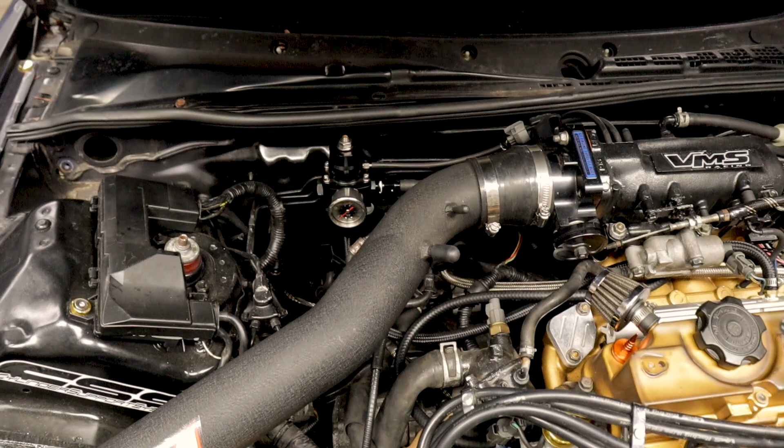This actually came in needing a handful of things before we even got to this point. So hopefully, as a part of that, we've eliminated a majority of what can go wrong. So what we had to do up to this point was mount the fuel pressure regulator. The clutch cable needed some adjustment. I think that has a strong chance of becoming a problem. I think it might just need a new cable, which we don't have, so that might have to be something that's done down the road.

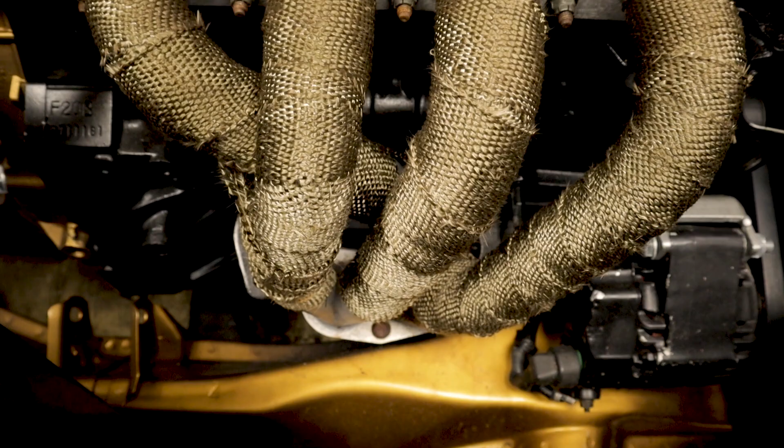I'm sure once I get in there and start driving it on the dyno, you're going to see it struggling a little bit to get in and out of gear, because the header here is, I don't know if it's bent or just the way that it fits in this particular car, but it's kind of pushed up at the oil pan, and it's hitting right into the shifter. There's really no easy way to correct that issue without taking the exhaust off, cutting it, doing a whole bunch of crazy stuff. So we're going to hold off on that for now and see if there's anything else that we need to deal with first. So that's kind of interesting.

We had to run wiring for VTEC, had to run wires for the wideband. Has an AEM wideband in there, so those seem to be a little bit hit or miss on whether they want to work properly with the ECU or not. So when this was first dropped off, I went to start it to pull it inside, and I didn't think we may even get to the point of getting on the dyno. It was running so bad. But the primary issue was the MAP sensor was wired incorrectly. So as far as the computer was concerned, it was seeing 10 pounds of boost the whole time. So obviously dumping a ton of fuel.

The idle control valve was not wired correctly, so I had to adjust that. Had pinched O-rings for the fuel injectors. Those were leaking. A leaky fuel line going to the rail. The fuel pressure gauge does not work, so I'm actually still going to need to set the fuel pressure, and corrected all of that. Finally got it to start and run like a normal car, and couldn't get the idle to drop below about 1500 RPM.

It was about a gallon low on coolant, so had to put some of that in there. Gonna check the oil one last time, just put some fresh plugs in it, and I haven't had any F20s on this dyno, so I'm not sure what it's gonna make. I think the last F20 I had was probably on our Dynojet way back when. Jeez, now that I look at it, it looks like the crank pulley is literally resting on the frame of the car, so might get some fireworks. Have to keep an eye on that. Huh, still has the balance shaft belt on it too. Haven't seen that in quite a while. Alright, let's get started.

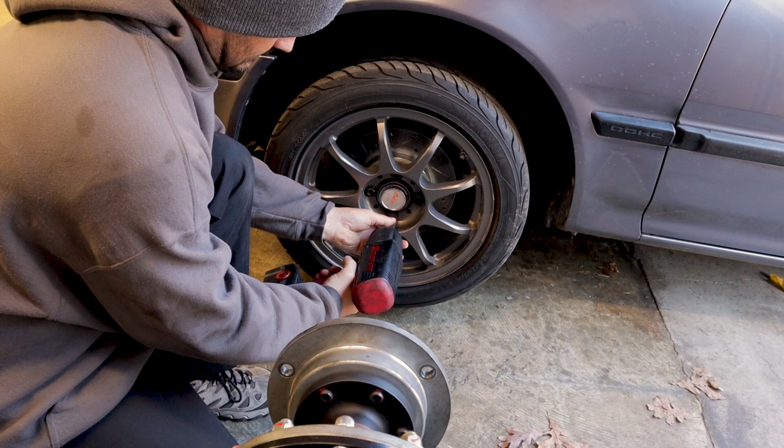Here's another benefit to a hub dyno. If this was on a roller dyno, there'd have been no reason to check it, but it could have gotten ugly pretty quick. All of the wheels are loose and about to fall off. You can imagine that a rotor directly onto the roller on a Dynojet or something like that would get torn up pretty bad in that situation. Have you ever wondered how the dyno actually connects to the car? Have a handful of these different hub adapters.

And the dyno just bolts to that.

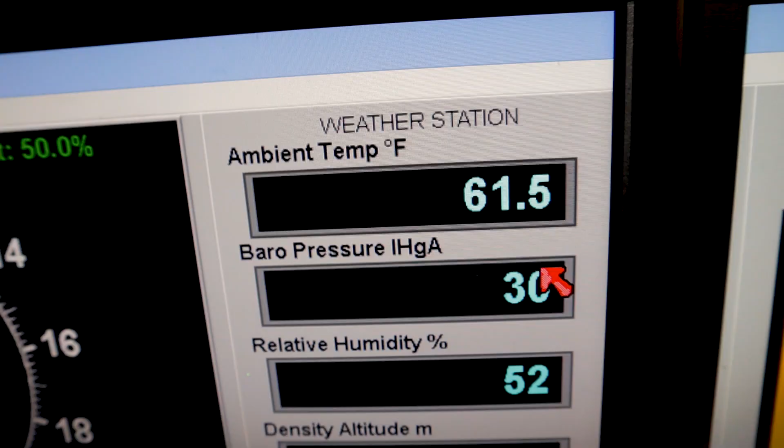61 degrees in here and I'm freezing to death. Hopefully that doesn't mean I'm getting sick or something. That would suck.

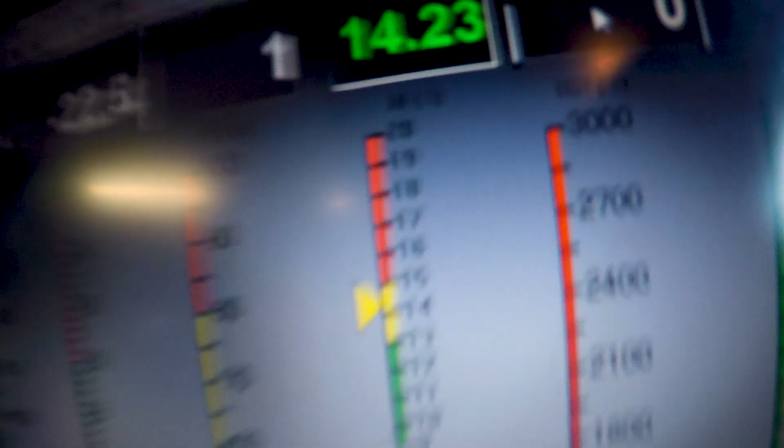This motor is really, really quiet. It's awesome, I love it. Just letting it warm up for a little bit. Ow! And set up the scaling for the wideband, and the AEM stuff's kind of hit or miss, but this one's pretty close. I'm happy with it so far. So like 14.2 or so here, and 14.1 or so here. Yeah, it's off just a hair, so I'll probably tinker with that a little bit more.

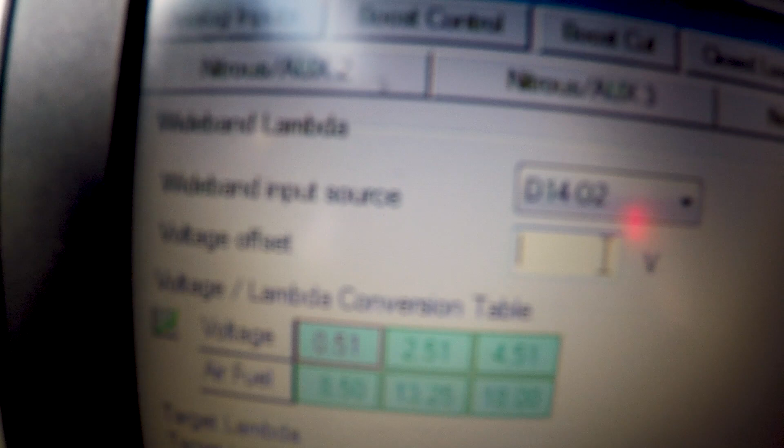So we go here to the voltage offset. That's where you would kind of clean that up a little bit. And then after you push the wrong button 100 times, come back here. 14.2, 14.2. So that's about as good as that's going to get. So the offset was about 0.2 volts.

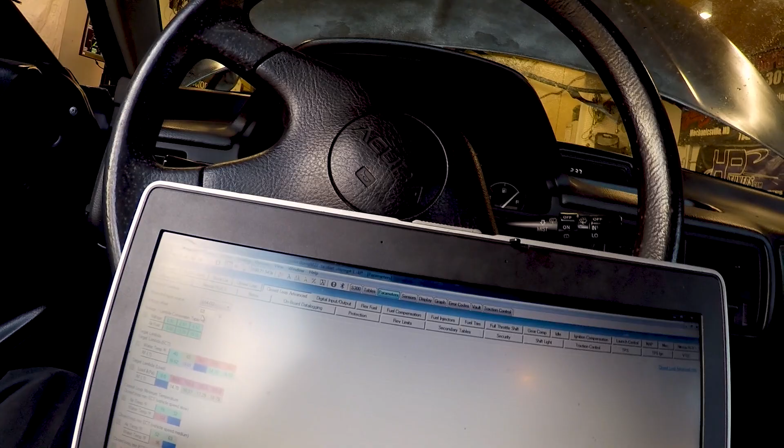That's pretty close, but if you ever get to the point where you need to change that number a lot, then you need to revisit how you've powered and run your ground wire for the wideband. 99% of the time that's an installation kind of error. There's a ton of information online, you can search that, but this is pretty good for now.

I set the timing on this about 4 or 5 different times yesterday or whatever day that was, but I wasn't able to get it to idle as nice as it is now. So now that the idle's a lot more stable, I'm going to go ahead and just resync that, make sure everything's good.

This is the best timing light I've ever used, and I'm pretty sure I've had every one out there. If this broke today, I would overnight another one tomorrow. I wouldn't even consider buying anything else.

I still can't believe how quiet this motor is. Usually these F and H series motors are so loud you're scared to walk near them. You're gonna get smacked in the mouth with a connecting rod or something. This is cool. So this has an F to B or H to B conversion kit, and the flywheel has no mark for the timing mark. So you're gonna have to do it off the cam gears, but the valve cover is not cut, so it's pretty hard to see. So gonna look kind of silly doing this, but it works good enough.

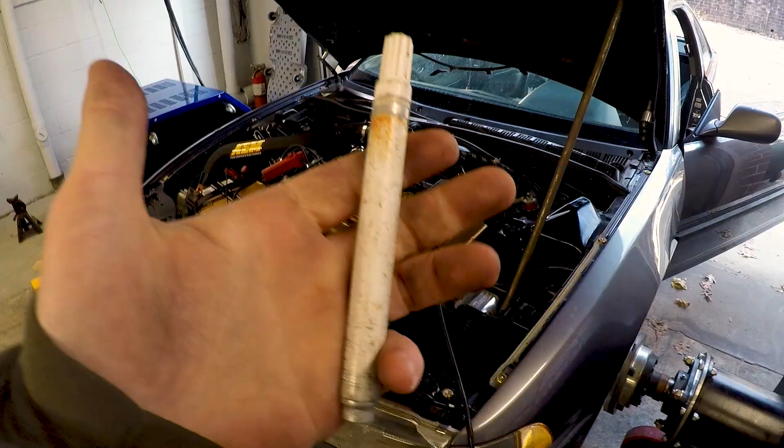The paint marker is actually a mandatory dyno tool, ironically. Let's see what wonderful shape this one's in. It gets used every day, just about, it seems. Alright, timing is good to go, so I guess it's time to start driving it, and let's see what some steady state stuff looks like.

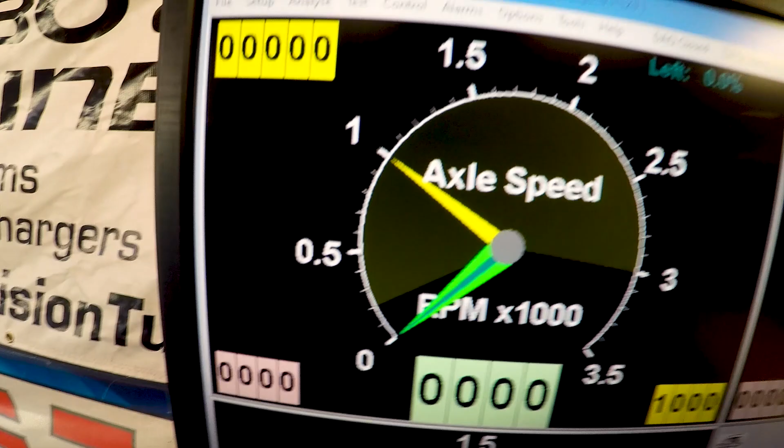So I'm actually not sure what transmission's in this, so I'm going to use the dyno to calculate the gear ratio. And then at that point, we'll use this screen over here, and I can set the axle speed, which will convert over to engine RPM, and then we can hold the car at whatever engine speed we want to. And I'll show how that just changes everything with part throttle tuning.

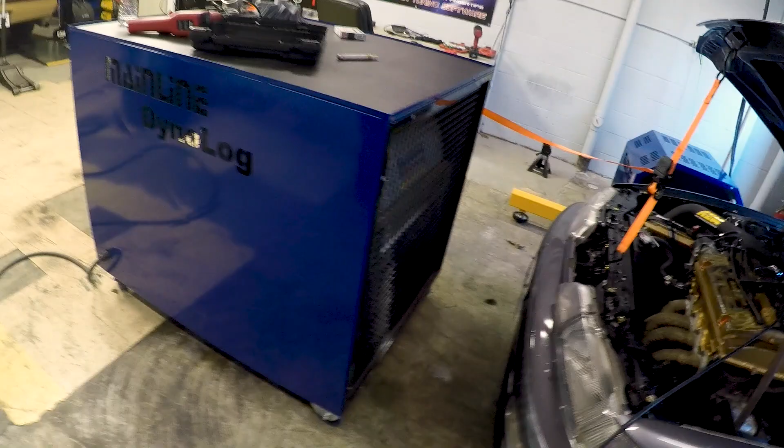It takes longer to get everything set up than it is to actually tune this thing, but my big crazy fan was trying to rip the hood off of the car, so I actually kind of had to strap it down so that it doesn't fly back and smash the windshield. I think I got everything working now, so start driving it a little bit.

I almost forgot I need to set the fuel pressure, so I'm just going to throw a fuel pressure sensor in it and load it up into the dyno and do it that way. So I just pulled the fuel pressure gauge out, and like literally not one drop of fuel came out. It's kind of unusual. Now I don't know what to expect with the actual sensor in there. Maybe we'll get lucky and it just seems weird, but it's normal. Let's see.

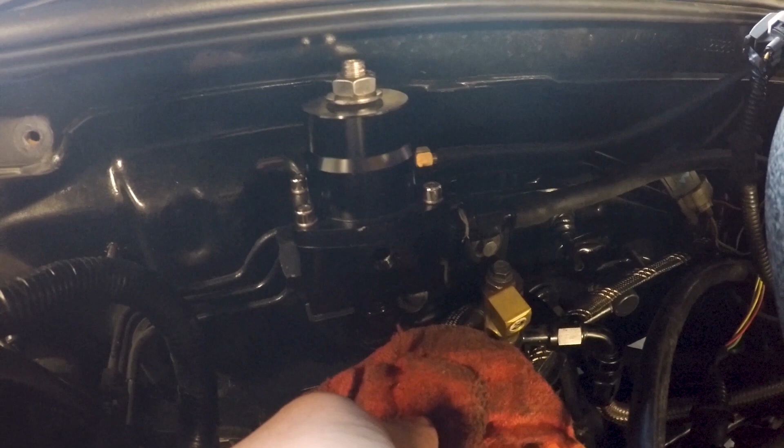So with the fuel pump on, there's no fuel coming out. This is really confusing. The car shouldn't even be able to run like this. Oh. Do they have the regulator plumbed backwards? Alright, this might be a first. Let me see what they got going on here.

Alright, so I've never seen this before, but from the fuel rail, I got it going to the bottom side of the regulator, and then this is going back to the fuel tank. So I need to swap these two fittings around. Hopefully the hoses and whatnot are long enough. They may or may not be, but I think I got enough there to at least hook it up, make sure it works.

Line's broken off of here too. Probably have a fitting for that. Alright, so we're roughly 40 psi, about 43 pounds, so that's where I want that. So we'll call that good. And I'll try and see if I have a fitting to fix this broken one.

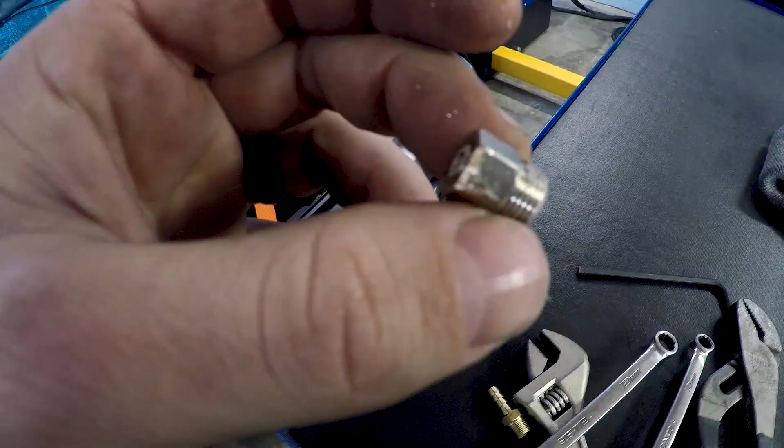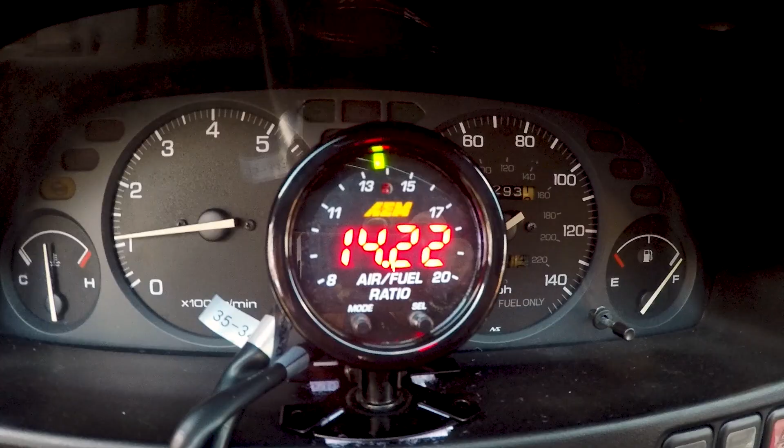This fitting was torqued to about 700 foot-pounds. I almost didn't think it was going to come out. We'll just swap it for one of these. Alright, back in business there. Let's start driving this thing and see what happens.

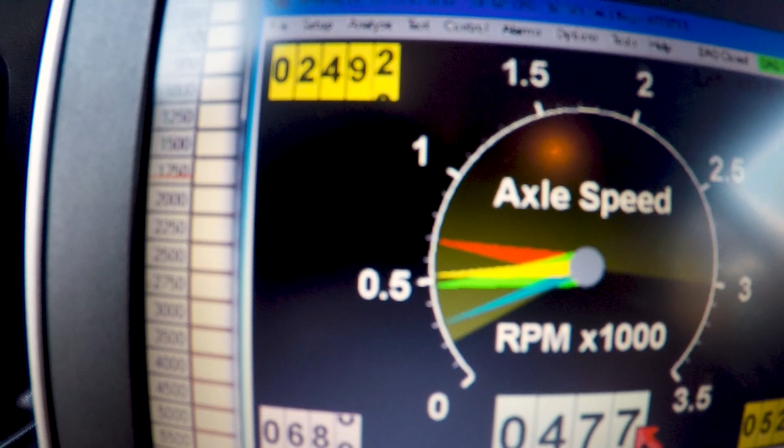Alright, you can see I have the dyno set to about 2,500 RPM. And see the green needle is actual RPM. Now you can see here, this is a 2,500 RPM load column. And I'm at 17 inches of vacuum, which is about 6% throttle.

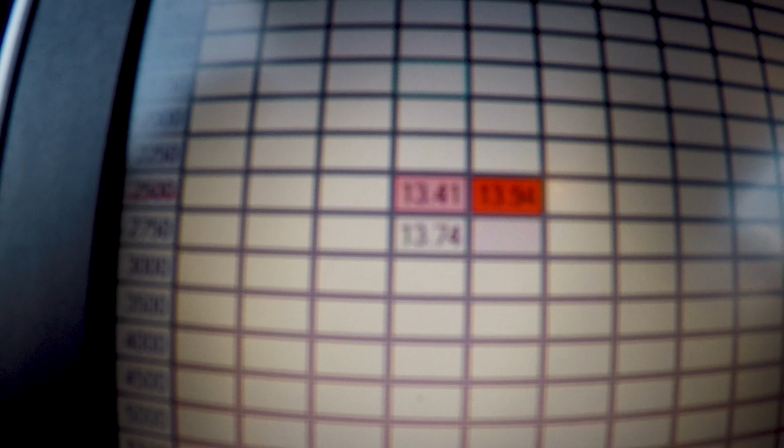And now the dyno, I'm going to roll into the throttle. The dyno is just going to hold it at 2,500 RPM. And then input what the air fuel is in each one of these cells. And you kind of want to let it sit there for a little while to stabilize. That's full throttle, still at 2,500 RPM.

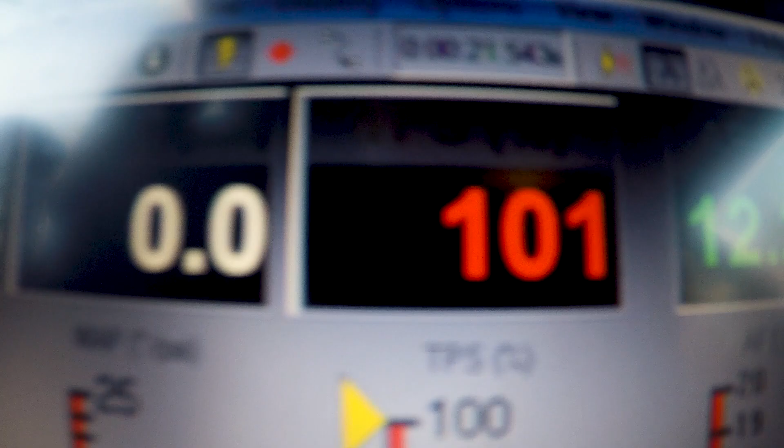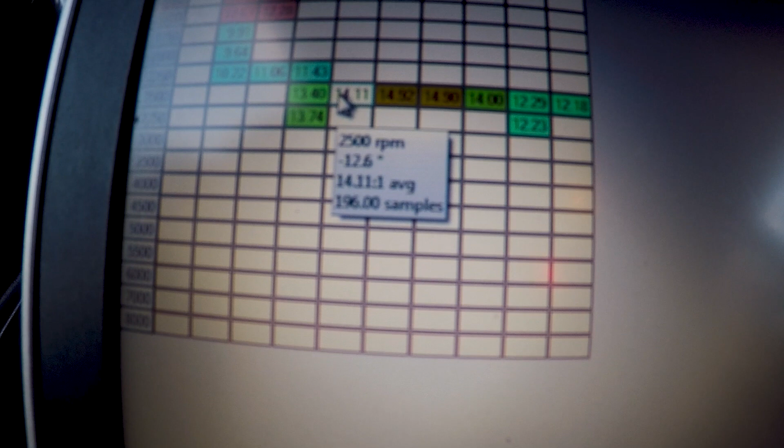So now all of these values here at 2,500 RPM, we can see what the difference is between our target air fuel and what the actual air fuel is. The target air fuel is going to change with throttle position and manifold pressure. You can see this is the first run, so it's pretty far off, but we're in the 14s here in the mid-range, and then a little leaner than we want to be, but up here in the full throttle range, it fattens back up, and a little further out from the target.

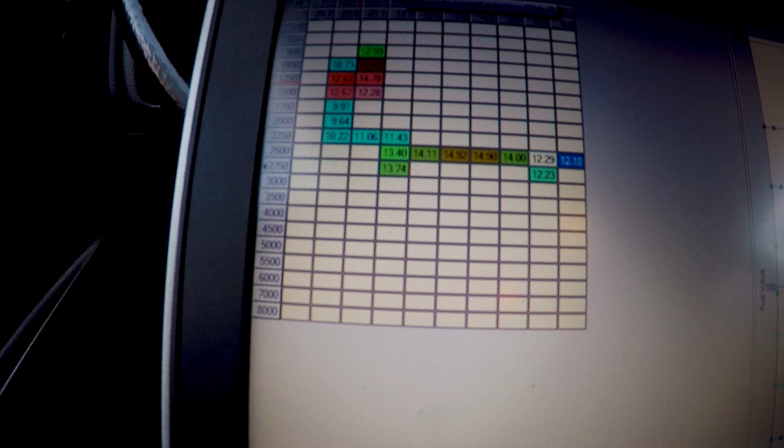But so we can repeat that through each one of these breakpoints: 2,500, 2,750, 3,000, 3,500, so on and so forth. And so you can view this different ways. I like this 2D view the most, and you can see here where I'm just kind of trying to rough it in. Once I get into the ballpark, then I can come back through and smooth all this out and make it look nice. And that's kind of how this goes. So let me smooth this out, and we'll bump it up and try some other RPM points.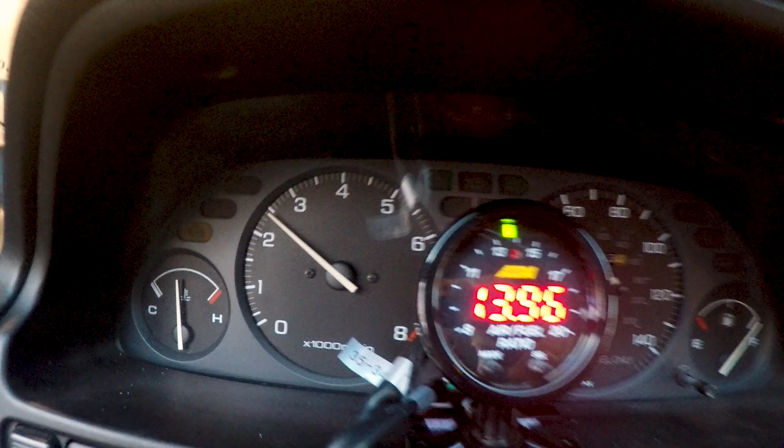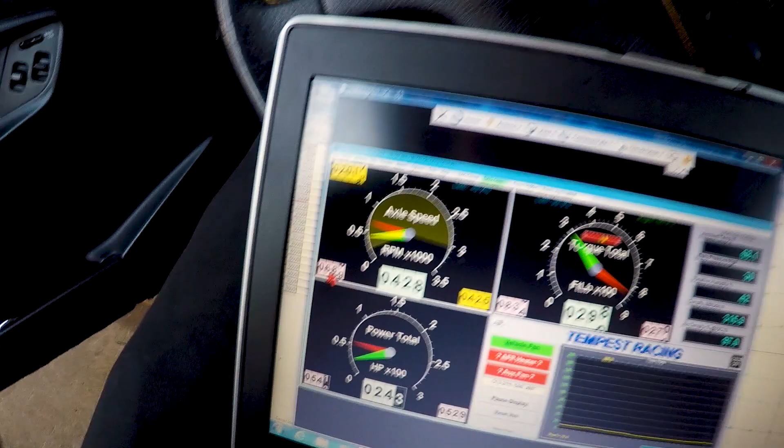Time, 50 horsepower full throttle, and then real-time torque. This is just kind of cruising RPM, cruising throttle, so it's pretty close now. So whenever you see I post a video and it's showing a car made 1,000 horsepower at 900 RPM: this is engine RPM, and this is the actual axle RPM, and that's the number that you're seeing. So yeah, everyone always freaks out and thinks that dynos give you bogus numbers. It's just a different way to look at it.

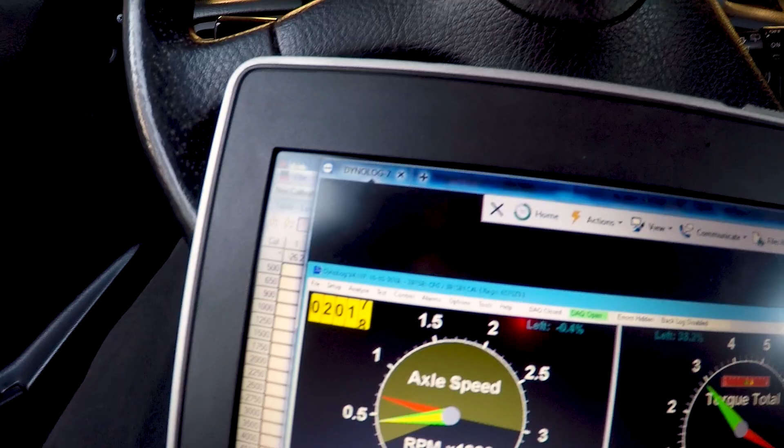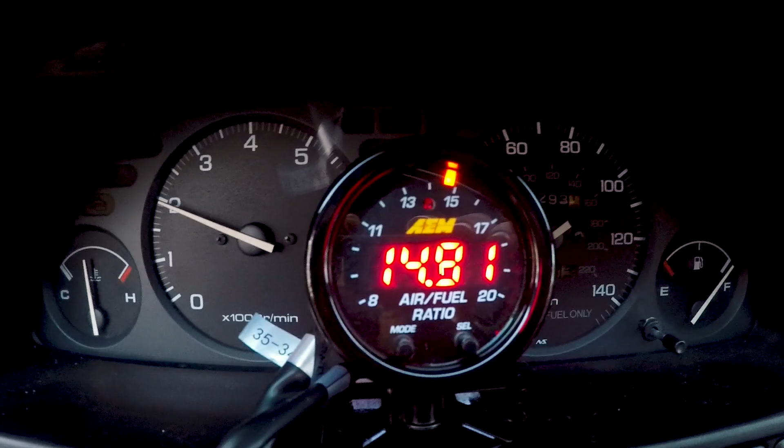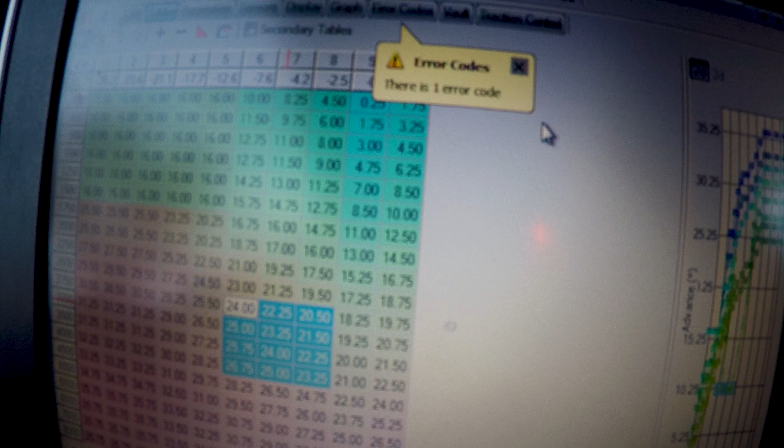So I just dropped the engine speed to 2,000... cell by cell, and you know, you can spend hours doing this. Torque stuff with timing. I'm gonna highlight all of these. Set everything in this area to 10. And then if I undo the change, pretty big difference. And that's all without touching the throttle.

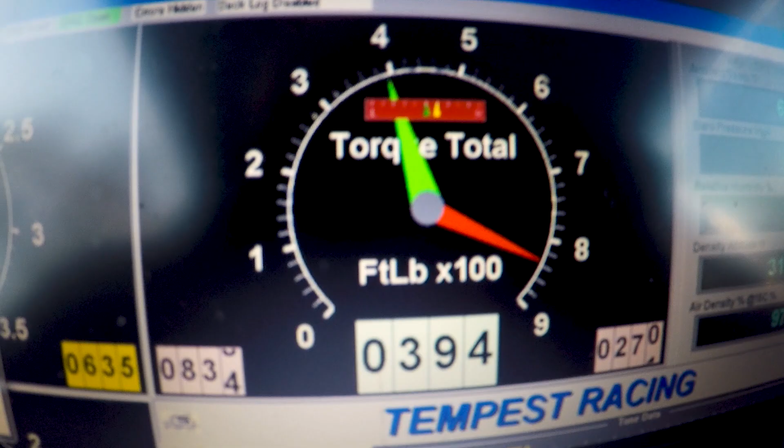Alright, I'm going to give this a minute to cool down. I just had a customer show up to drop a car off. And I'll probably need to do 1 or 2 more sweeps of this part throttle. And then we'll switch over to full throttle and start doing some actual sweep style runs. That's where it gets a little bit more fun.

Ironically, this stuff here can be more entertaining to me than the full throttle stuff, kind of depending on what it is, but there's a lot of cool stuff you can play with, and this dyno just changes everything as far as figuring out what's doing what, and what's working, what's not. And you'll see when we do the full throttle stuff that we can actually monitor the dyno graph and everything real time, which I can't explain how helpful that is, especially when you're really pushing the limits of something. And I'll go into a little bit more detail on that here in a few minutes.

Alright, just swept all the cells up to about 4,000 RPM. I'm going to switch over to start doing some sweep runs now, but this car runs really hot. I saw the radiator fan on it earlier on and was kind of questioning how well it was going to work. So that might be an issue, but the steady state stuff demands a lot on the car for cooling, and then the sweep stuff's a whole lot easier. You can set the runs up to only be a few seconds long, so it's not putting as much load on the car versus holding it at a given RPM. It's like you're driving up a mountain.

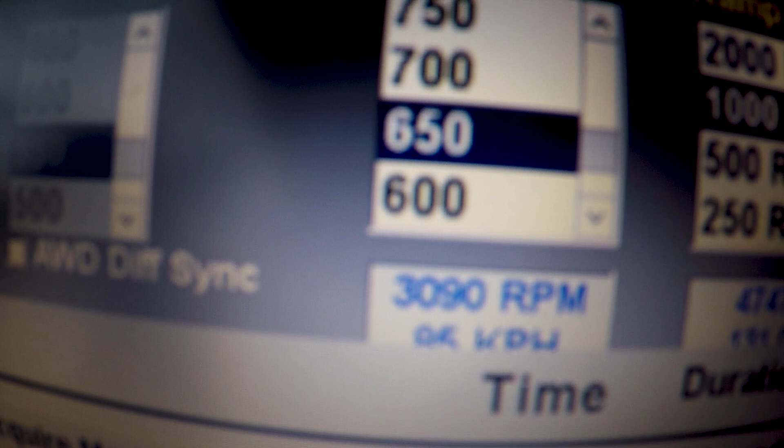So the rate of acceleration, I'm going to use 120 RPM per second on this. I'm going to start at 650 axle RPM, or about 3,000 engine RPM, and then I just set the end speed higher than where I'm going to go. Last car I did was scaled for 2,000 RPM. Don't think we're going to need all of that.

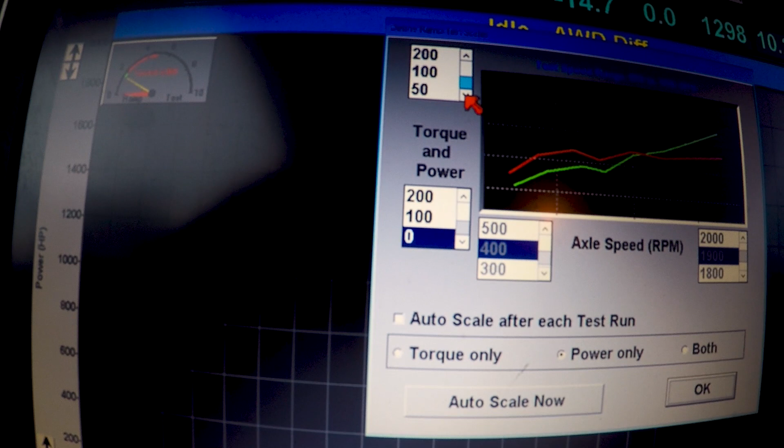Computer's going in slow motion. Will be more than enough.

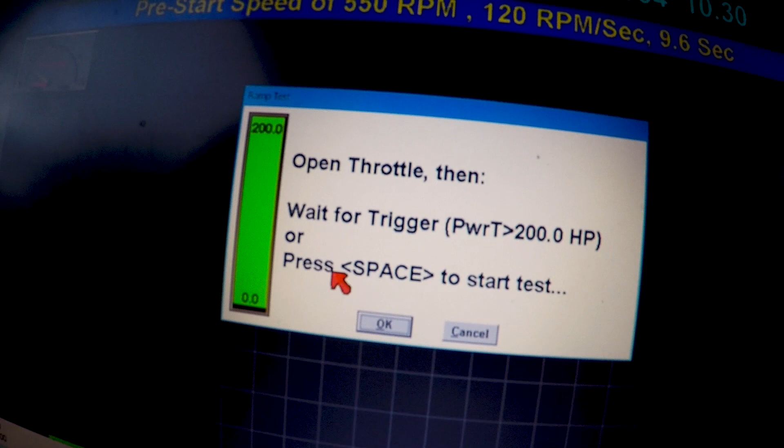I'm set up to start the run at 200 horsepower, which isn't going to work for this, so I'm going to change a lot of the setup. I guess the last car I did must have made a lot of power. So we'll change this up and make some runs without VTEC on.

This trans is so hard to put in gear. Just gonna make a short run without VTEC on.

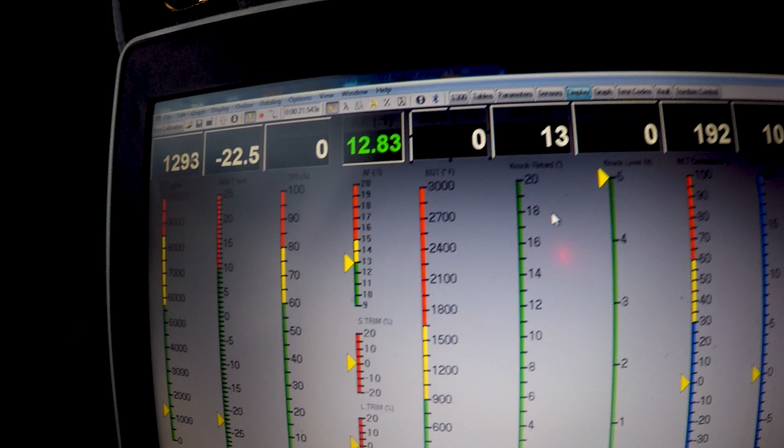Some fueling at higher RPM.

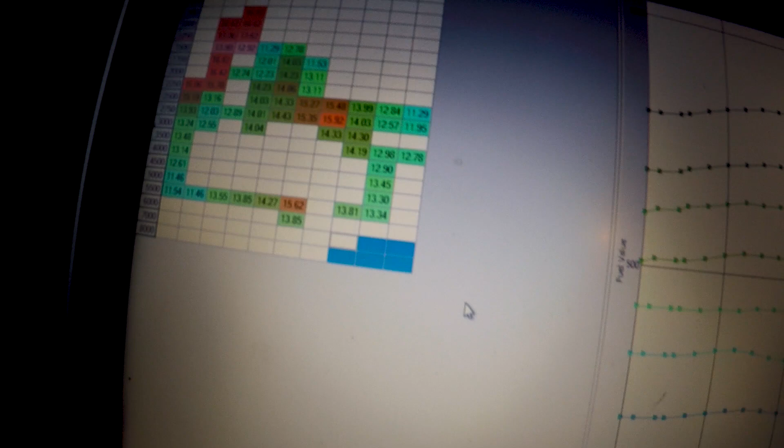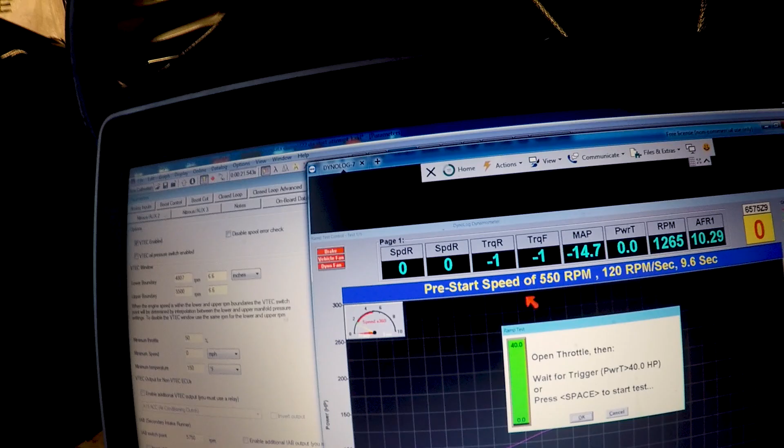Turn VTEC on and start trying to populate the high cam map. Alright, just set VTEC to come on at 4,800 RPM. Hopefully it works. These things tend to, well, for whatever reason, when they end up in swap cars, seems to not want to work all the time. Let's see what we got.

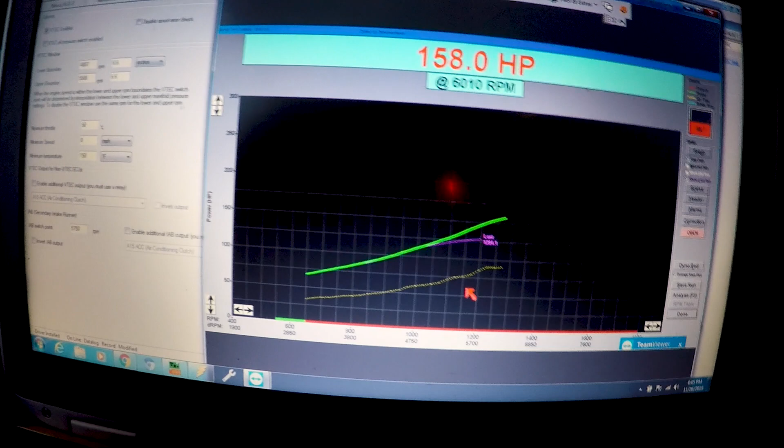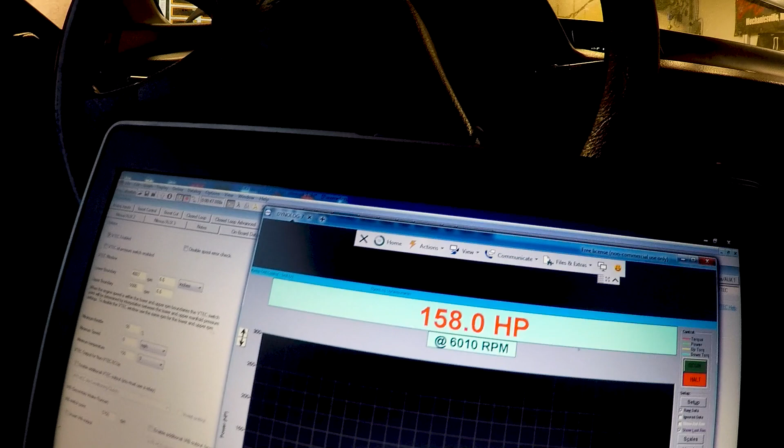It's super lean, so it's actually a good sign. Power wise, I don't know, I guess it's on track to what I was expecting. This dyno is very stingy on all motor cars. Anything less than 200 horsepower, it kind of really, I don't know, it doesn't read anywhere close to what my DynoJet would read.

And you can see there's a big time delay in this graph here. I'm just remotely connected to that computer over there, so yeah, there's just working on a delay, so ignore that. Gonna need to get some screen recording software to make this easier, but...

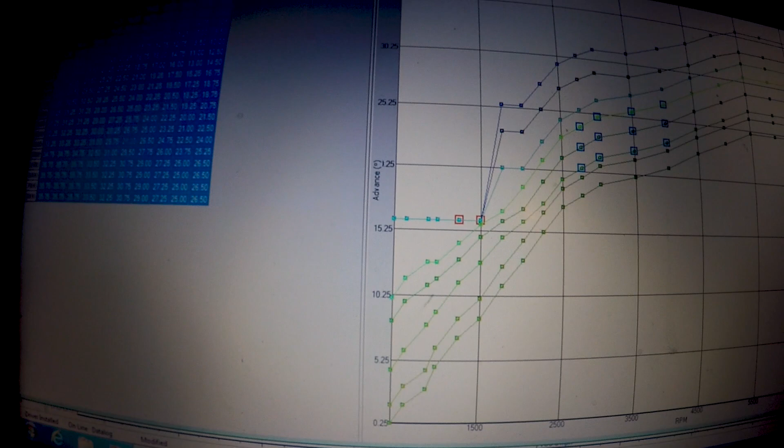It looks like about 5,500 RPM. We need some fuel, so I'll go over here to the high cam. And so if you look at the shape of this, where it says we need fuel is right in shape with this map I started with. I've tuned so many of these that most of the maps I have to start with are pretty close, and this is following the same trend.

And my battery is about to die, so I'm gonna make some changes there. Hopefully it'll take a couple runs to get the fueling straight. I can rev it out all the way and then throw a little timing at it and see what it does.

My guess starting out before, you know, before you can put it on the dynos, I was hoping it would make somewhere like 175, 185. So looks like we're not too far away from that. And that was only about 6,000 RPM.

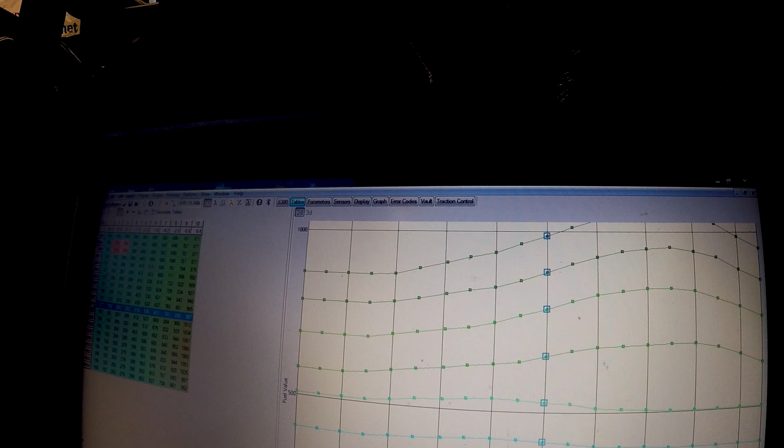Alright, let's try this again. It's kind of hard to do holding two computers, a phone, camera, a shifter, steering wheel. This will be way easier once I figure out some screen recording software, so I'll do that next.

So the power is actually really close to what my prediction just was. It's like right where I thought it was going to be. Now it's about 7,500 RPM. You can see it's starting to lay over a little bit, so probably take it to 8.

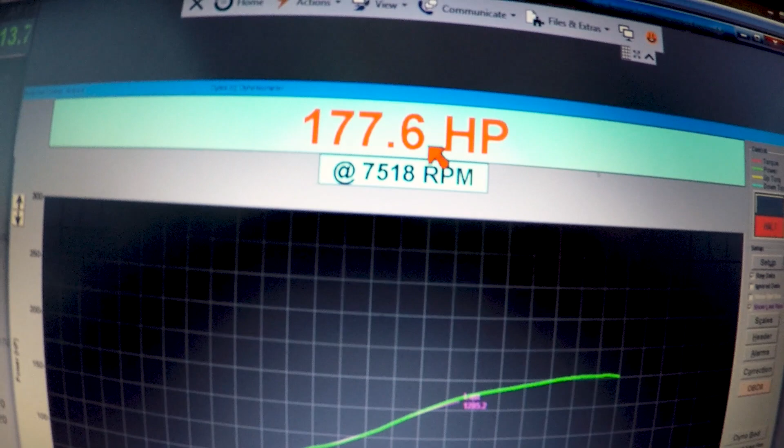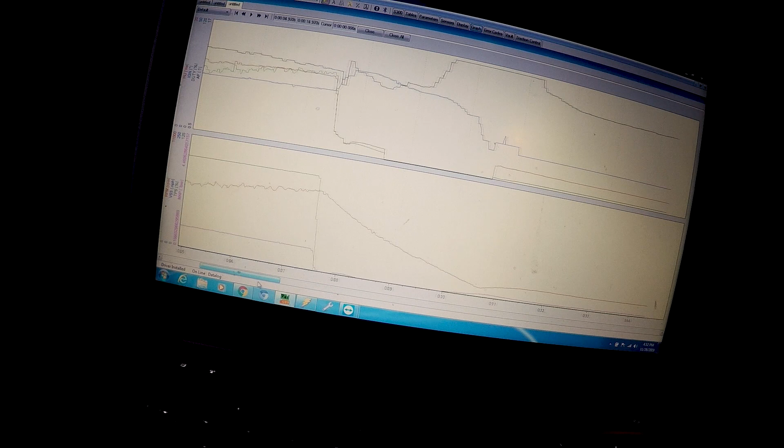Hopefully with a little timing this will jump up over 180. And fueling for the most part was pretty good. I think there was a couple of cells I might need to add a touch to, and then above 7,000 RPM, it starts getting a little bit rich. So we'll pull that back out.

Distributor on this car seems to be a little skanky. That RPM trace is kind of gross. Alright, we're pretty close. Hopefully a few more runs will be ready to go.

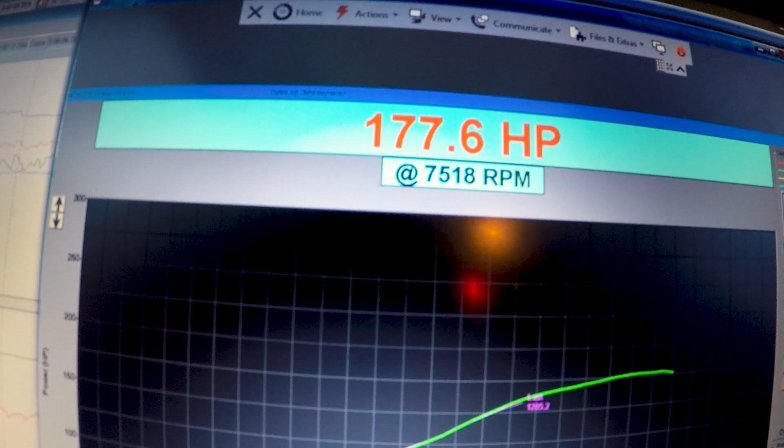Probably the most important thing to note here is how smooth the graph is. With some more timing, it'll probably smooth out a little bit more. Once you see graphs that look real choppy, like this RPM trace, when you see a dyno graph that looks like that, it's usually a sign of an engine that's unhappy.

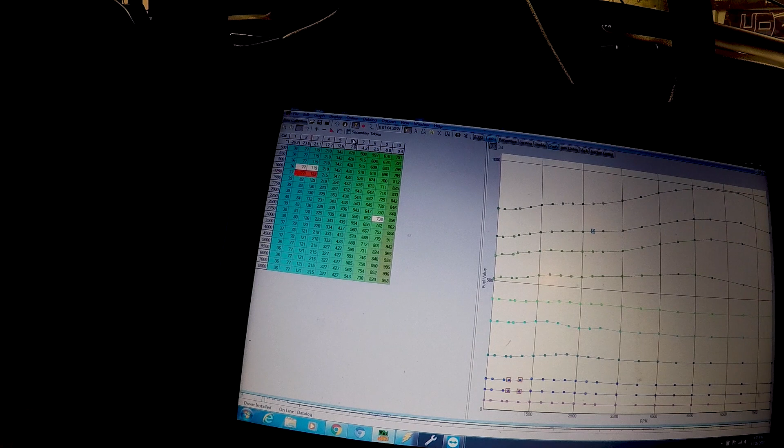So 55, 5600. Add a little bit. Blend it in a little bit.

In, even though we won't be up there.

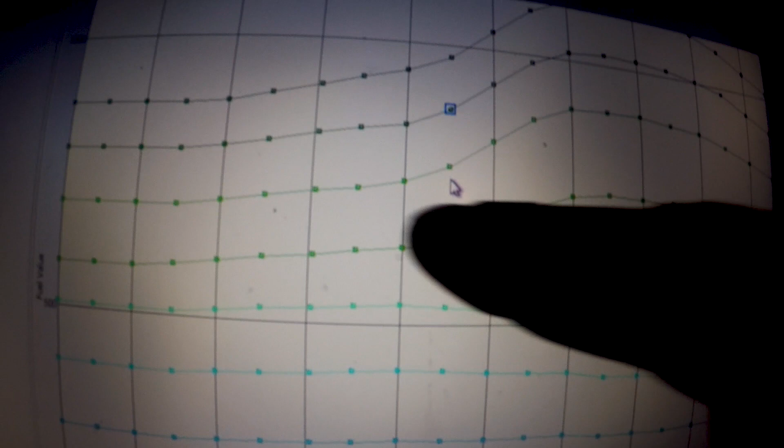The big thing is you want everything to be nice and smooth like this. When you start having big humps, and say for example you move this up there like that, and maybe move this one down here like that, as the engine's running through, it's going to have these big huge spikes, and that'll just make it run pretty rough. You'll definitely feel it.

And if you look at the data log and monitor the injector pulse width, you'll see that it should, in theory, stay nice and smooth like this. If the pulse width is doing this instead, then the car is just going to run all jerky and nasty.

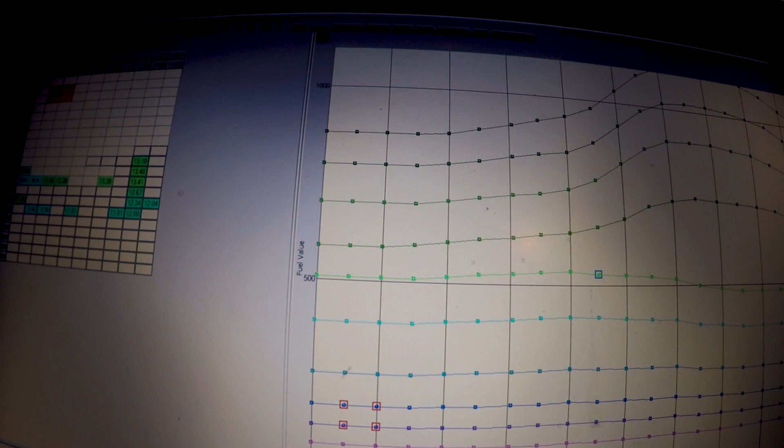Alright, I'm pretty happy with that. I'm going to throw 2 degrees of timing in it, see what that does.

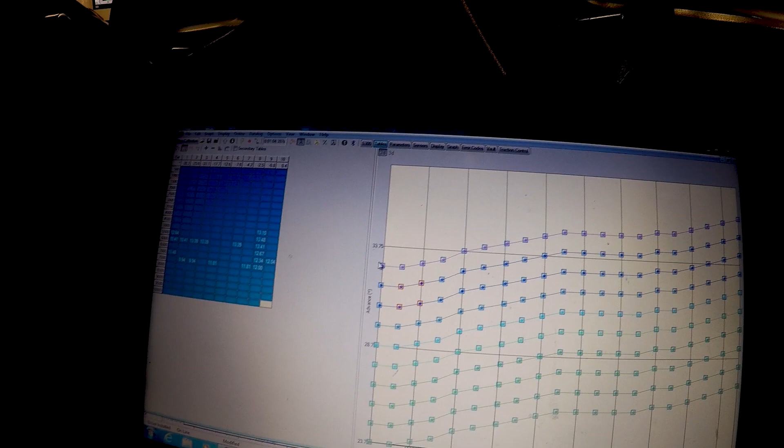There's a couple spots here I need to smooth out a little bit. Can't see the tach, and the headlights don't work.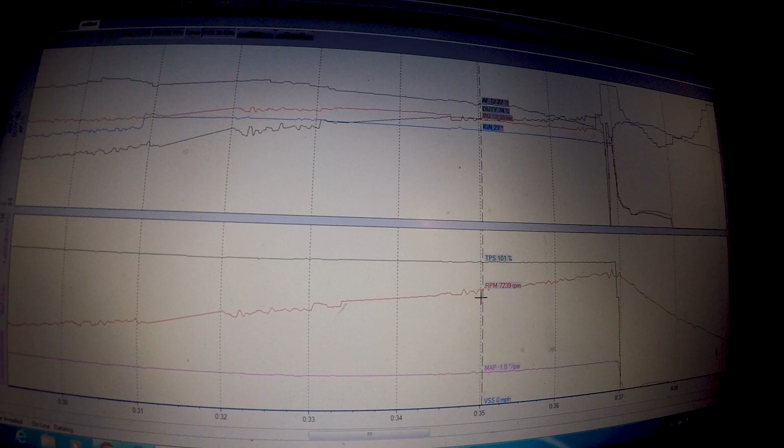So I'm just going to verify the rev limiter is in a safe spot and try it again. This is actually a little interesting. You can see everything's kind of working like normal, then it pretty much freezes, goes back, freezes. This is the type of stuff you kind of don't have to deal with as much on some of the higher end computers. This thing's making 1200 horsepower and just dropping signals and stuff, and that can get expensive pretty quick on what it tears up.

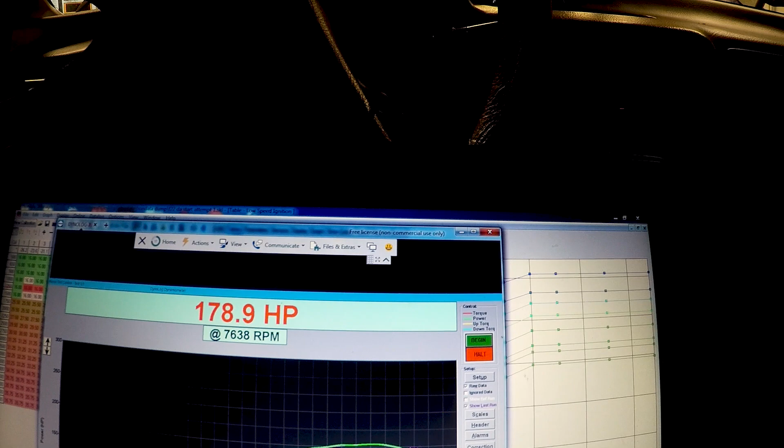Fueling was right on the money on that one. I don't need to change anything there. I'll make another run playing with the timing, and I think that's going to be about what we have.

It's pretty nice that once you have your first run, wherever RPM you want to go to, you can just watch it real time and know where you need to let off. This car's not a very good example because it's not really accepting the timing very well, but for the sake of conversation, let's turn this fan off.

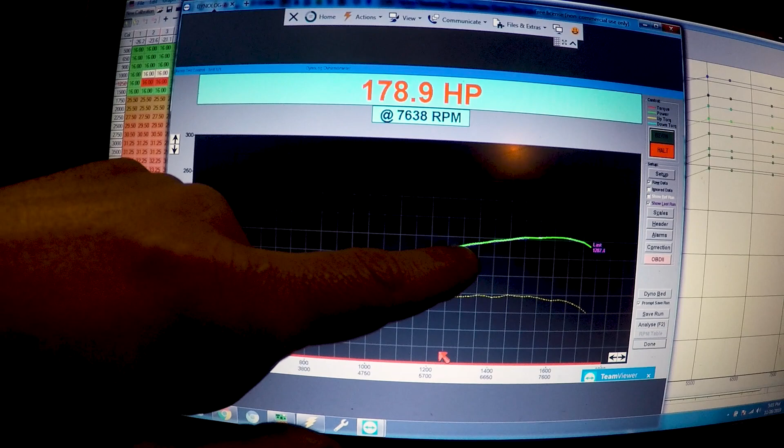Say this is a big power turbo car and I just put some timing in it, and you watch it ramp up into boost and see that the power is dropping off, you can get out of it. You don't have to complete the whole run to see what the timing's going to do, like some of the other dynos I've had in the past. I've also had it where you're making a run and all of a sudden the horsepower goes up way more than it should, so again you can get out of it and make sure boost didn't go too high or the distributor didn't move or whatever happened. This real-time plot is just invaluable. I love it.

I really like to find another horsepower too, so let's see if we can manipulate the timing a little bit to do that.

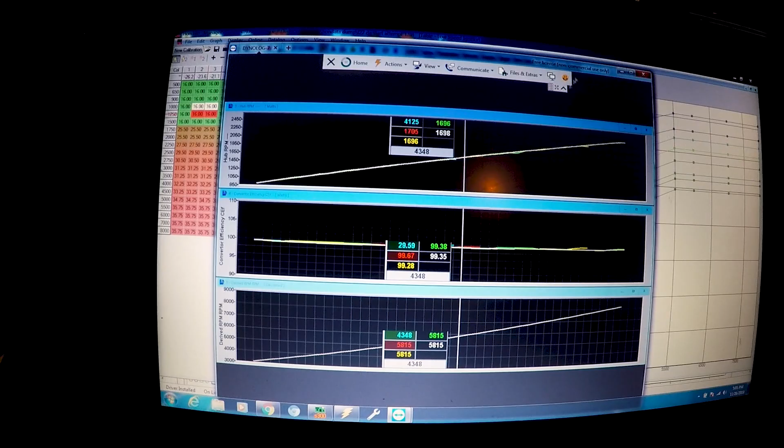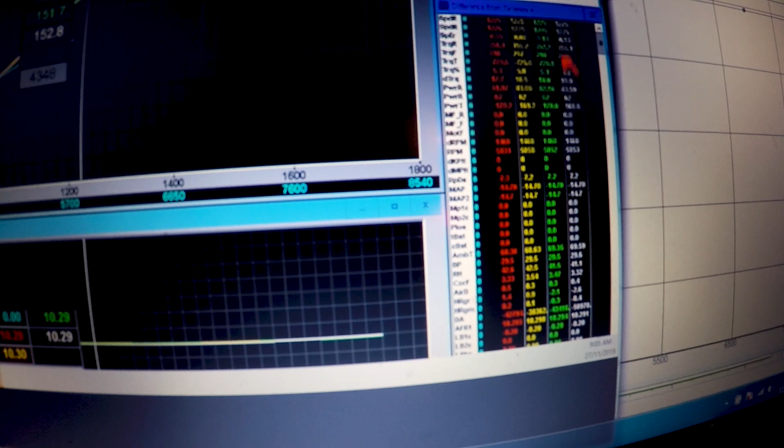I also have multiple screens and an endless amount of channels that I can view, however you want to choose to view it. Two monitors, pretty much data points on anything and everything you can think of for each run. It'll show you averages, it'll show you the difference, so you can click at this point and see what the difference is between whichever run it is and the reference run - horsepower, torque. This thing's great.

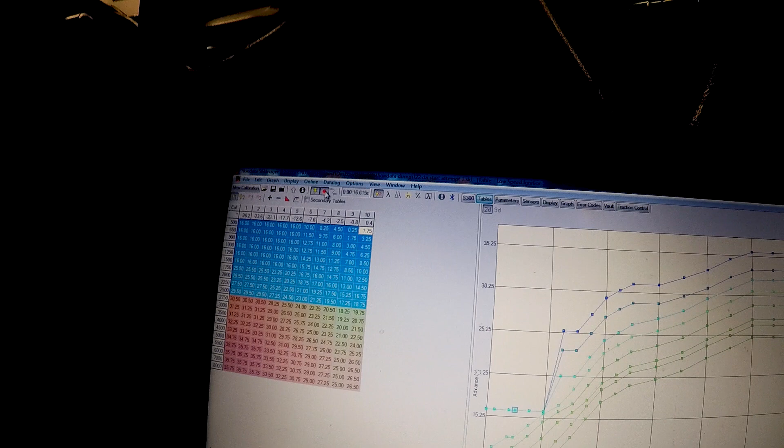Alright, play with some timing. I don't know what it's going to do. Realistically, if I let it cool off for a while, it'd pick up a couple horsepower. The air intake tube on this is really small, so I'm assuming going to a larger diameter tube there would pick up some power, but considering it was within 1 horsepower of what I thought it was going to make, it's not so bad.

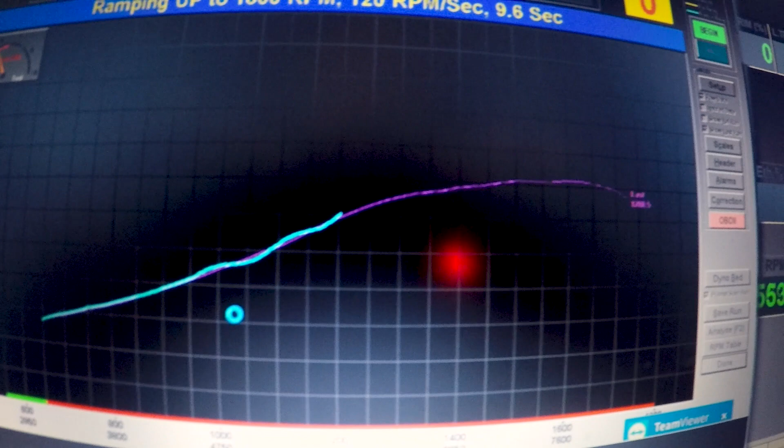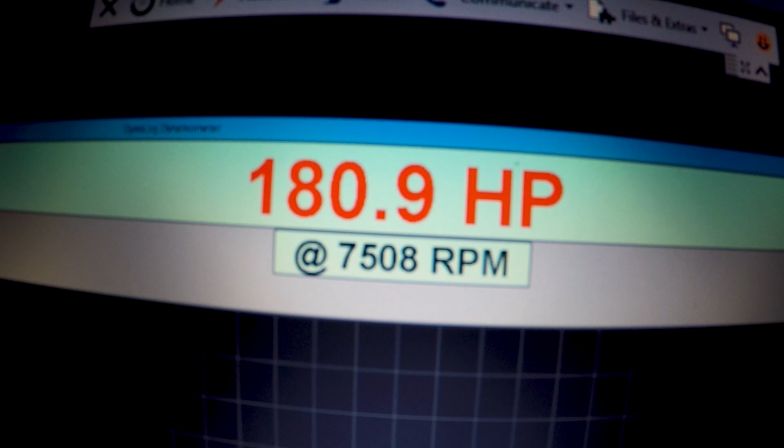Literally on the dot, exactly what I was hoping it would make. That's pretty cool. Yeah, I'm pretty happy with that, and the graph is just perfectly smooth. Let's see what it looks like scaling at 200.

So on that note, I'm going to call this one good. It's actually supposed to be home 10 minutes ago. I still need to take this off the dyno and bring it in, need to set the two-step up, and I'm still not real happy with the way the idle control is working on this. You swing it from 0 to 100% duty cycle and the idle barely changes. Actually confirmed the other day when we were doing all our testing that it's working - it's doing exactly what it's supposed to be doing, it's just not bypassing enough air. But considering when this car came in, I didn't think we were even going to get it on the dyno, and now it's doing within 1 horsepower of what I expected. Yeah, I'm happy. So we're going to call it good here, and thanks for watching, and we'll see you next time.